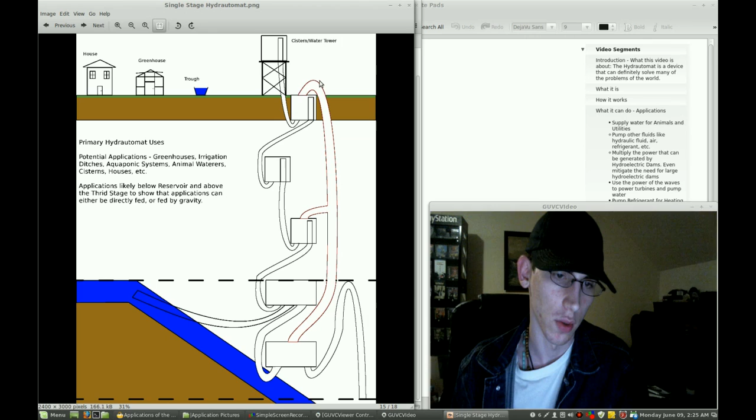So what we're going to do now is go into the first application of the Hydrautomat, which is what it was originally built to do: raise water from one point to a higher point, from a high water level to a higher one. I'm not going to go into the details of how this works - you can find another video on that. I'll put up an annotation or link just to save time and focus on the applications, because I don't want to be repeating everything in my videos every time I do this.

So anyway, you have the high water mark here, and the low water mark here. Just with this drop, you can multiply this up two or three different times, just with the original arrangement like you see in the patent. Just with this arrangement, you can raise the water from this point - just by having some of it drop down to here, you raise some of the water up into here.

The main uses of this thing: you can use it for water storage, pumping water up into a water storage tank. You can use it for agricultural and industrial uses as well. You can also use it for residential and municipal reasons.

So I'm going to give you a list of some of the things. For agriculture, you could supply water for irrigation ditches and any kind of drip tape, any kind of irrigation out there - there's many different forms, and a lot of new stuff coming about in the past few years especially. You can basically water plants with it, and supply water for animals - here's a little trough, and you also have automatic water feeders and stuff like that for animals.

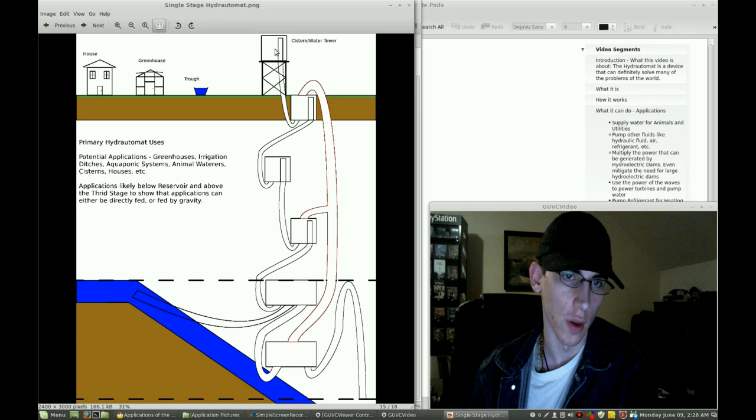For houses, if you have a cistern or water tower that's high enough, you can just gravity feed the water into a house, because the water pressure falling from up there creates equilibrium at about this level. So a house below has water that's always pressurized to some degree. This means you can provide pressurized water for houses, so when you open the faucet on the sink, it actually flows out - that's another thing you can do with this, have a gravity-fed water supply.

You can also use it for aquaponics systems, which is basically the same thing as irrigation - or, every time I say aquaponics I forget about hydroponics. Yeah, you can use it for hydroponics, you can use it for aquaponics. You can use the Hydrautomat for all kinds of different things like that. Aquaponics is pretty interesting - I won't even get into that, but you can also do cisterns and things of that nature.

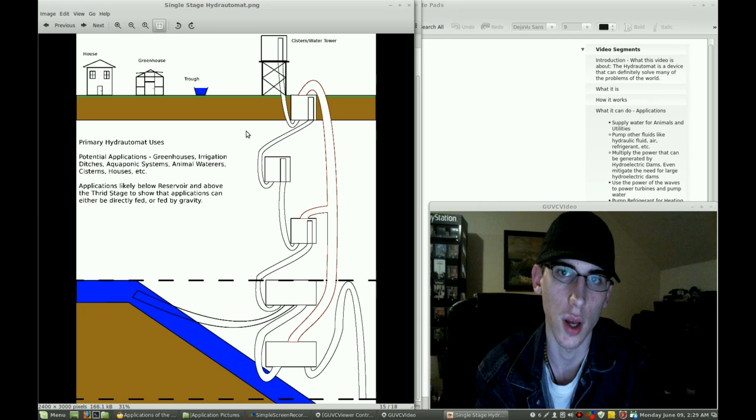So basically, it's mainly domestic, maybe not so much industrial. You can use it for cooling and stuff like that, supplying water for cooling. It's primarily agricultural and kind of small scale stuff you can do with the Hydrautomat as it is.

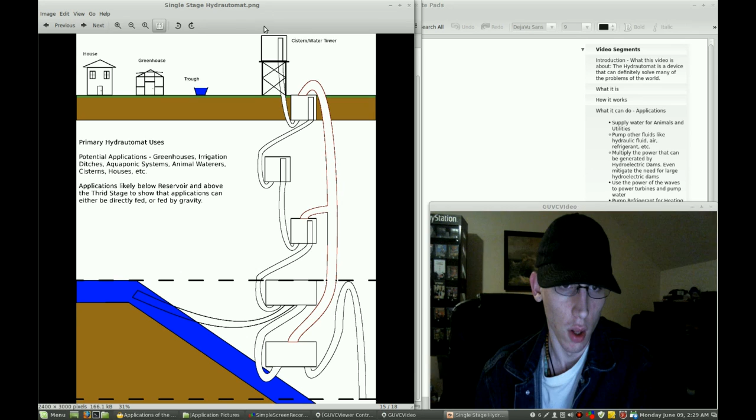You can also stage this thing. You can have more than one Hydrautomat connected to another in order to get even greater heights out of this thing. So that's another thing you can do with this device.

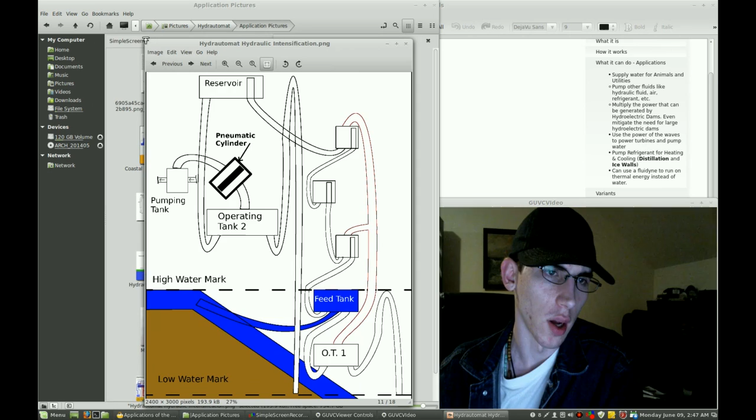Now another application for the Hydrautomat is actually the ability to pump different fluids with it. Even though it's originally designed to just pump water for irrigation, you can actually use it to pump things like hydraulic fluid and even gases, if you get a hydraulic cylinder or something like that to separate out the two different fluids. If you keep the air in the operating tank separate from whatever fluid you're pumping, you can use the action of the Hydrautomat to pump whatever fluid you want - it could be a gas, a vapor, a liquid, even a thicker liquid like oil. You can actually pump with this device.

Very interesting. So I'm going to show right here on the screencast. You can see here it says pneumatic cylinder or whatever, that's what I'm talking about. Basically this is a piston or something like that, and what this acts to do is help separate the fluid in the pumping tank and the communicating hose right here. By the way, this right here isn't directly connected to this at all - they're just intersecting, but the air in here is not touching the air in here. This is separate from here, just to let you know.

Anyway, as long as the gas or whatever you're dealing with right here is separate from what's in here, you won't have to worry about something like ammonia or refrigerant seeping down into this hose and interacting with the water, because it can contaminate the water when it goes back out into the river, and you'll lose whatever you're trying to pump, provided it's not like air or something. If you're pumping alcohol, ammonia, freon, or other fluids, knock on wood they don't come through this thing, but if you get the proportions right, there's no way this thing's going to be coming up through here unless something really disrupts the architecture of this thing.

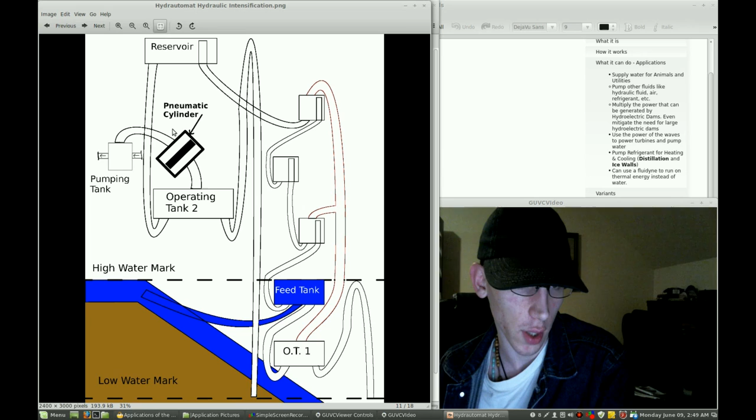But as long as this is calculated out, you're not going to have a fluid come up through here. But as for a gas, yeah, you can have a potential mixing - like ammonia could come up through here. If this hydraulic cylinder wasn't here, ammonia could seep up into here, mix in with the water, and create ammonium hydroxide, or household ammonia as it's also called, and that would get out into the groundwater and wouldn't be good for the earth either. So that's why this right here would be very useful to have.

So if you're dealing with air or something you want to pump, you get a cylinder, and when this thing pressurizes, it pushes the cylinder here, the cylinder pushes the air in here, and that pushes whatever's in here out. Then when this drains out through the siphon, the air sucks on here and pulls the cylinder from here to here, and then it pulls the air subsequently up into here. And when you have that vacuum, this check valve closes, and then the only place it has to pull from, aside from inside the tank, is the inlet.

So then it'll just pump the stuff in here, and on the pressure phase it pushes out through here. Pretty interesting. You could pump all kinds of stuff with it. You might even be able to pump hazardous materials with it, as long as you have something to separate it so you don't have to worry about it getting in, and as long as everything is made to spec to handle whatever it is you're handling.

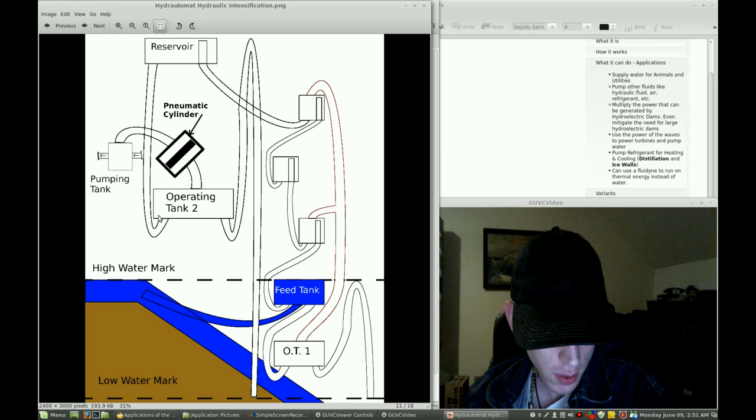Oh yeah, the intensification - I don't think I wrote this down. But with this device you can take advantage of the hydraulic multiplication of force. As you can see, this pumping tank is probably a third to a fourth the size of this operating tank, right?

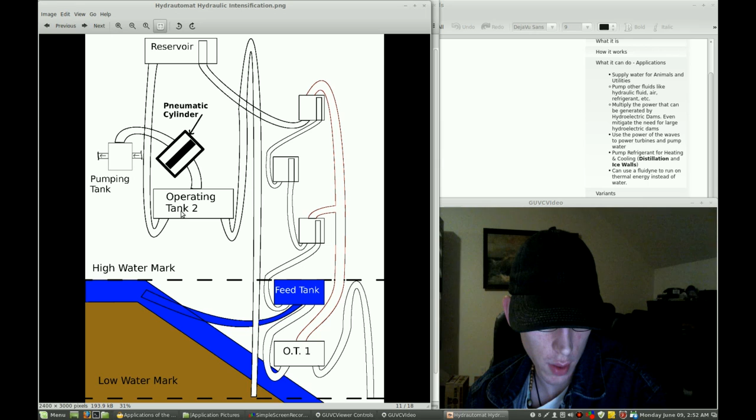When this operating tank fills up, say the pressure of the water falling into it generates pressure like, I don't know, 5 psi. This is incremental and eventually stabilizes, so it's actually very dynamic, along with the fact it's an open tube. But just say, for example, we got 10 psi - an easier number to work with. So there's 10 psi in this operating tank, and say this thing is 1/10 the size of that, even though it's really more like a third or a fourth.

Provided the hydraulic and pneumatic cylinder dimensions are correct and calculated out - or let's forget that for a moment and just say there's directly a hose connecting to this tank. If you have 10 psi going in through here, and this tank is 10 times bigger than this one, what will happen is the pressure exacted upon this tank here will actually be 10 times the amount, because it's 10 times as big. So it'll be 100 psi in this tank right here, while here it'll only be about 10.

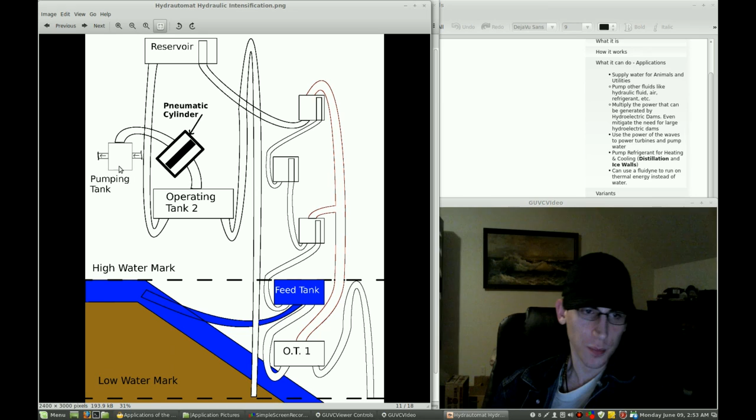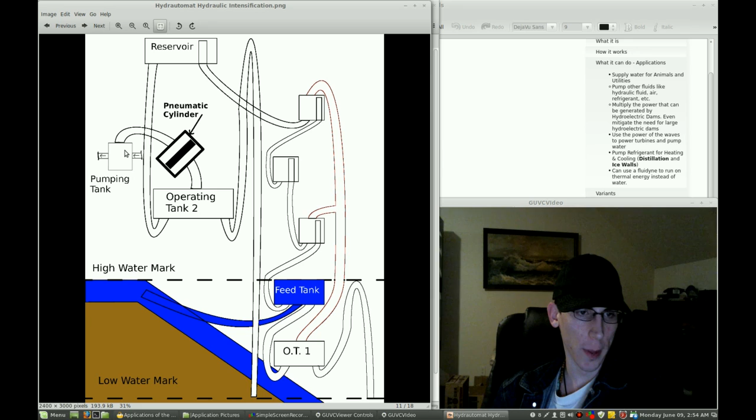That's called hydraulic intensification. So if you need high pressure for whatever reason, you can just have a gravity-fed system generating a relatively lower pressure. But since there's such a high volume, when that pushes on a smaller tank, you actually have a ratio there that intensifies the pressure. So you can create much higher pressures with just the same amount of starting pressure through basic hydraulics.

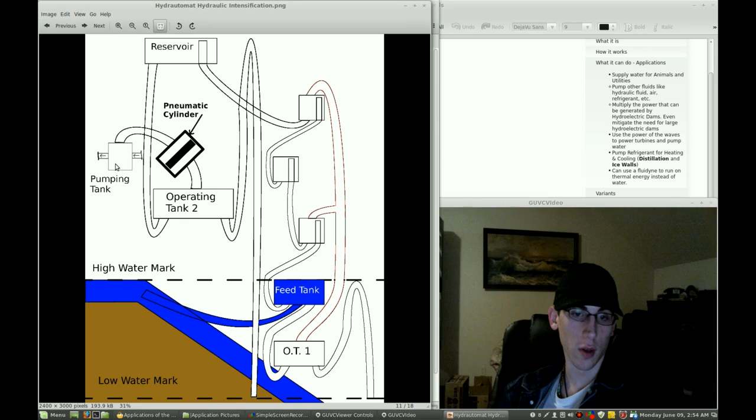Basic pneumatics is another thing you can do with a Hydrautomat to help pump things even higher, or do whatever it is you want to do with it - run a pump station or whatever. So that's another interesting application for it.

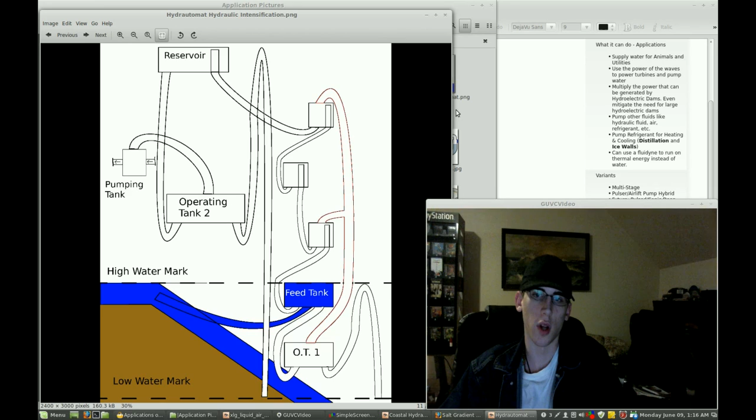Third really interesting part is that if you pumped something like Freon or some kind of refrigerant through here, and had a compression fitting and a compression valve or an expansion valve - basic refrigeration stuff - you can create heat and cold through vapor compression refrigeration and vapor compression heating. What you can do with that is create two things.

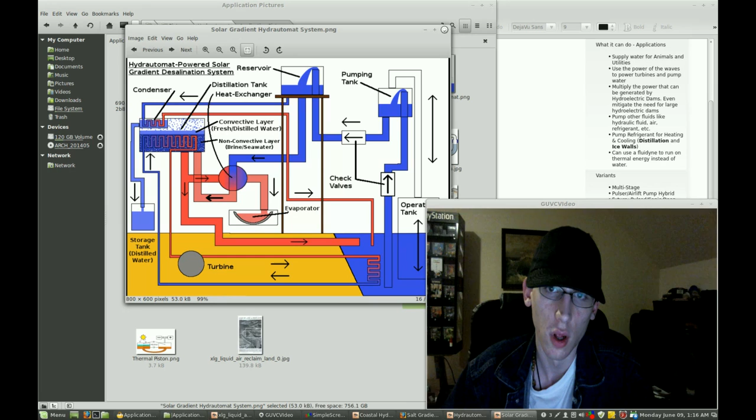You can use it to distillate water and stuff, like is seen here. But what you can also do is create - you can also freeze things with it too. So you can use it for refrigeration inland, for domestic, industrial and commercial uses as well.

And basically what you do is you just run the refrigeration coils into the water, in like an ocean or something, and you can create a temporary dam made out of ice with this thing.

In 1932, I think they were planning on doing this, but as most of us know, World War II was coming up, and I'm pretty sure the Germans didn't want to go through with this project because this was supposed to be in Germany, right on the border of Denmark, near the North Sea. That didn't go through because of World War II and the invasion of Poland. They didn't want this thing to get sabotaged, and a little bit of land would have detracted from the war effort, I'm sure.

But anyway, this device can create temporary ice dams, which can be used in civil engineering for building temporary structures for all kinds of things. In this case, it was to reclaim previously submerged land. They also wanted to use a dredge to pump the seafloor into the other side of the dam, so you could fill it up with new land and use it for agriculture or whatever they wanted.

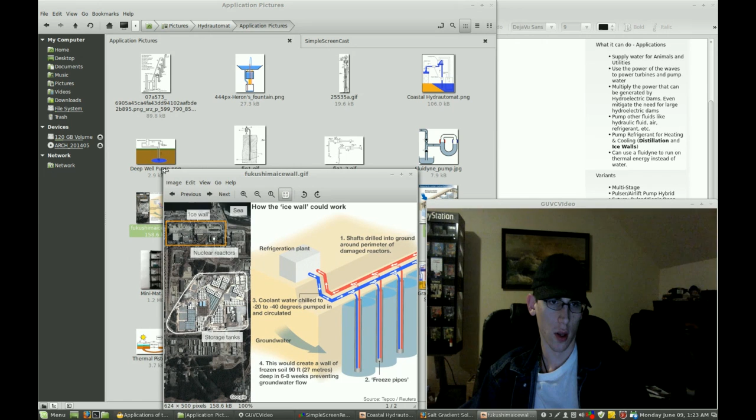Following up on the ice wall, another thing that's doable with it, which is actually being proposed right now, is over at the Fukushima Daiichi nuclear power plant in Japan. They're proposing to put up one of these ice walls there, probably powering it off the grid or something like that. This thing would be used as a kind of sarcophagus to encase this ring of nuclear reactors at the plant.

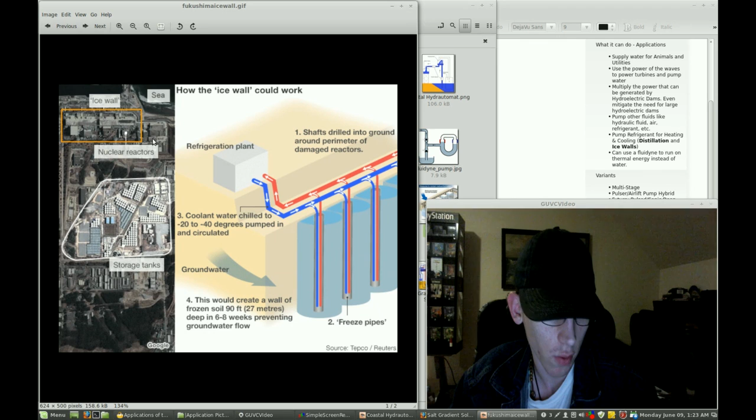So all the reactors that are leaking right now, what they want to do is surround it with a perimeter of refrigeration coils that go down into the ground, entombing it with ice. This would prevent groundwater from washing down into the aquifer and carrying contaminated ground out into the ocean. I hope they get this done quickly, because it just keeps leaking all the time.

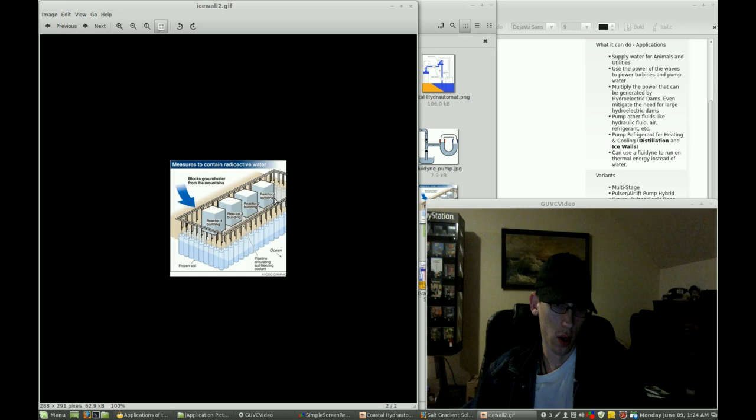Anyway, this is one thing that's been proposed, and it's a pretty good idea. That's another thing you can do with an ice wall - use it as a safeguard against nuclear reactors leaking, or at least keep groundwater from carrying away contaminated soil. It's a safeguard against the more likely doomsday scenario - nuclear reactors going off instead of nuclear war. Maybe even put an ice wall around those storage tanks.

Aside from the nuclear thing, you could also deploy an ice wall for dams and waterways. So whatever the reason, if you wanted to dam something up temporarily with ice instead of building a giant wall, you could just run some refrigeration coils and do that. If you want to make a new hydroelectric dam, you can do that too.

So one of the larger scale things that can be done with the Hydrautomat, namely with structures that already exist like hydroelectric dams, or maybe even a waterfall - this is mainly for hydroelectric dams already in existence, not so much a waterfall, but any kind of drop or decent sized slope.

You can actually use this to assist the dam - it's kind of like an auxiliary power unit. You can use the Hydrautomat as an auxiliary power device, one that helps bring a secondary source of power to an already existing hydroelectric dam. As you can see here, this yellow bar would be the dam itself.

This structure here would be the turbine, this would be the low water mark, and this would be the high water mark. This right here is where everything would be dammed up, and this would be the other end of the dam where there's not much water. This would be the inlet, this would be the outlet, and this is kind of like an entrance to that.

So I kind of oversimplified the Hydrautomat - I just put a gray bar instead of drawing all the tanks. You can see the one tank here at the top of the reservoir, so it looks like a water tower more than anything. It works the same way as all the other conventional Hydrautomats - this is basically a traditional Hydrautomat, but it's just really tall.

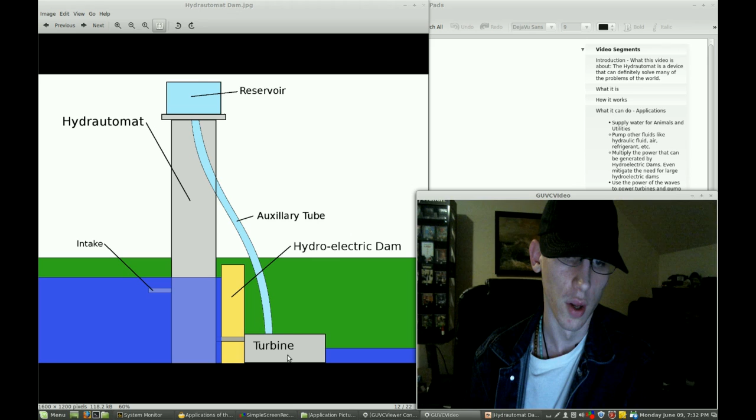150 psi limit here, another 150 psi limit here, makes 300 total, and that'd be supplied by 300 psi pressure being generated by the fall from the reservoir tower down to the turbine. So you could power twice as much if this thing was running at two-thirds capacity, or if this thing was running at full capacity right now, you could have three of these things powered, something like that.

And that's one application you could have with a Hydrautomat - you could use it as an auxiliary structure to increase the output of a power station like this, out of a hydroelectric dam. You increase the output by three times as much, just with the normal thing alone.

And if you selectively control which tanks can have pressure and suction applied to them, you could have like 10 or 12 or however many pairs of these things up in the air, just going to ever greater heights. And even though you could have a setup that would only allow you to run like say two pairs of these, only run two open tanks, only run two closed tanks.

So say this is like the default arrangement where the operating tank can only power two tanks at a time, and you have like 10 of them. Well, you can not run eight of these things and just slowly carry the water up tank by tank.

So say that these tanks are in service now, and then you want to get this up to a higher one, but say there's a second pair up here, say there's a third closed tank here, right? And you want to power that closed tank. You want to have the operating tank create a vacuum that can suck this water up into this third closed tank. But these guys already would overload this thing, so you won't get any real power out of it.

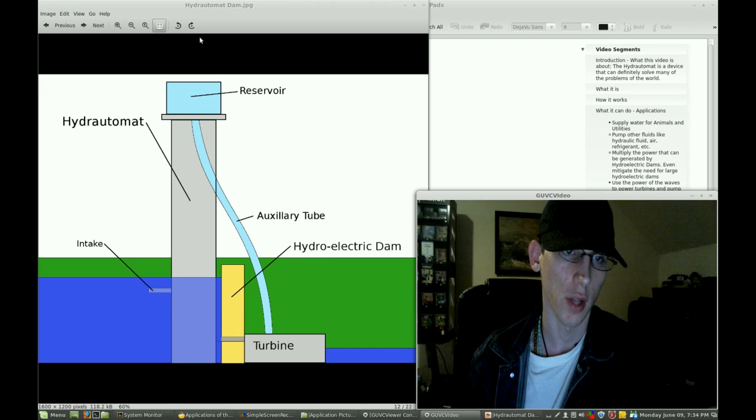But what you can do is turn off the closed tank here at the bottom, so that only this closed tank and this closed tank here - imaginary one right now - would be running. So these two would be pumping, and this one wouldn't be running, and you just shuttle it up that way. So you could turn off the ones on the bottom, and then turn on the ones at the top, and just slowly, piece by piece, step it up, just by closing off the air supply to certain tanks.

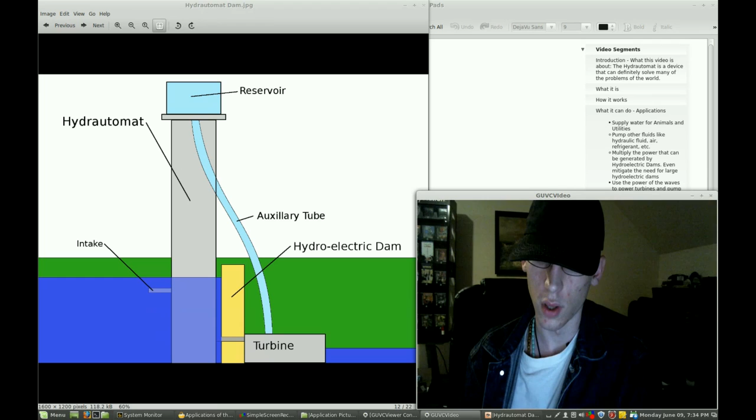So that's another thing you can do with this thing - you just take it to a really large distance just by controlling which tanks have power to them. That's another really interesting thing you can do with the Hydrautomat.

All right, now we're going to move on to some more varied versions of the Hydrautomat - things that are quite a bit more out of context with the original patent. And this one right here is a coastal, or more maritime, version of the Hydrautomat, which means that it's meant to operate around the coast and wherever there's waves.

You can do it in the Great Lakes or anywhere you have a large enough body of water that you usually get some decent sized waves out of, enough to power the Hydrautomat.

So basically this thing is a wave powered Hydrautomat. The way this works is, as you can see right here, we have the operating tank. And in the operating tank, you can tell there's no feed tank on top.

There's no siphon coming out of it or anything like that, and that's because it doesn't actually need one at all. Instead, what it uses is just the power of the waves to push it up and down, because the operating tank is actually modified.

Instead of having a closed container where you have a few openings in it, you have like one bulkhead at the top and two at the bottom.

Instead, what you have is just an open bottom container, so that this right here is just open to the ocean or whatever, and the water can penetrate through without any problem.

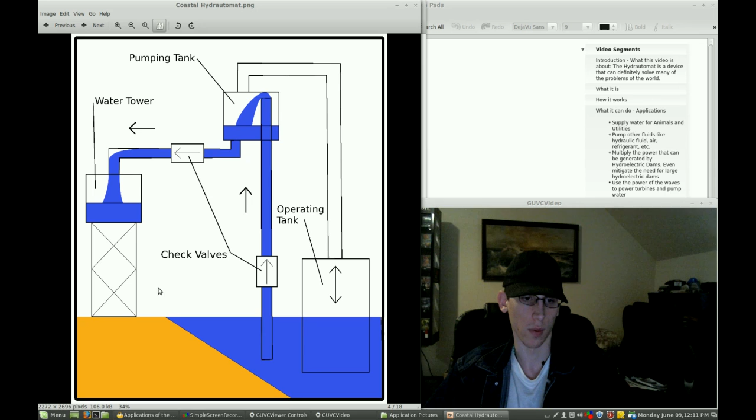And yeah, so you can power something with that right there, just by force of gravity. This much of head here. And yeah, so that's for this part here.

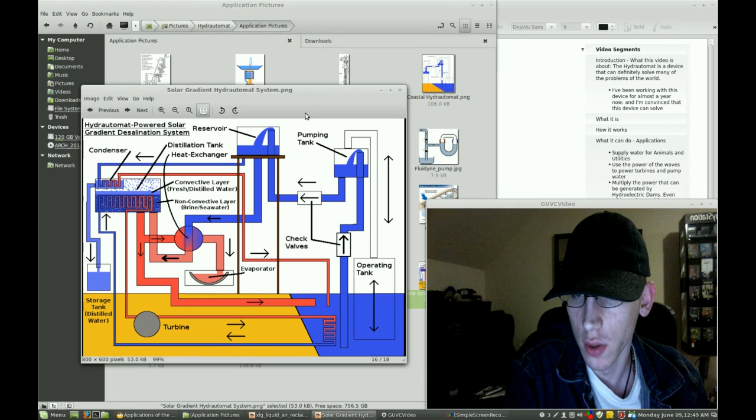Okay, now we're going to go on to the solar gradient pond, and thankfully a whole bunch of software issues have been worked out. So anyway, we're going to go on now to the other application of this.

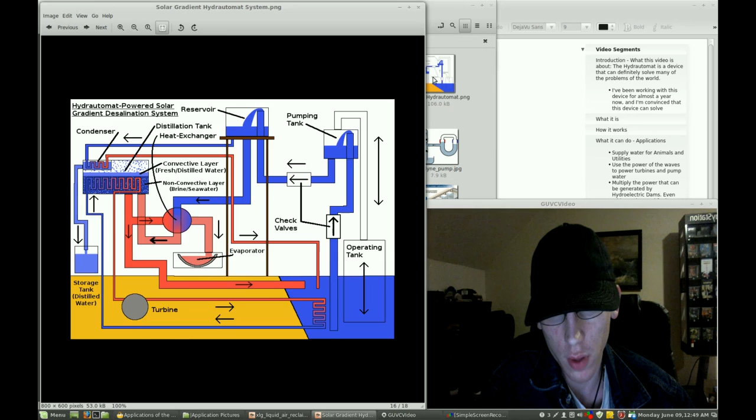Hydrautomat, and as you can see here, I have a full-blown illustration of it with all the colors and nice things to it. Basically, what you can do with the Hydrautomat is you can use that coastal configuration you can see right here, which I think I explained in a previous clip.

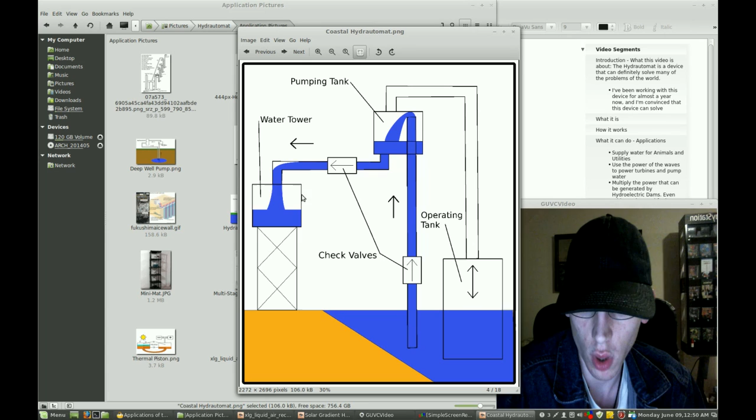I'll have to go back just in case things get all messed up. I've had issues with these screen recorders and webcam things. But anyway, this operating tank here has this coastal thing where it's powered by the waves, pumps water upward, and instead of just simply putting it into a water tank right here.

So instead of just pumping the water up into here like this Hydrautomat is doing, you can have this awesome looking thing right here, and you can pump that into the water tower. But the water tower, instead of just sitting there for whatever reason, can actually fuel what's called a solar gradient pond. I'm gonna have to explain this all over again because my last video got annihilated.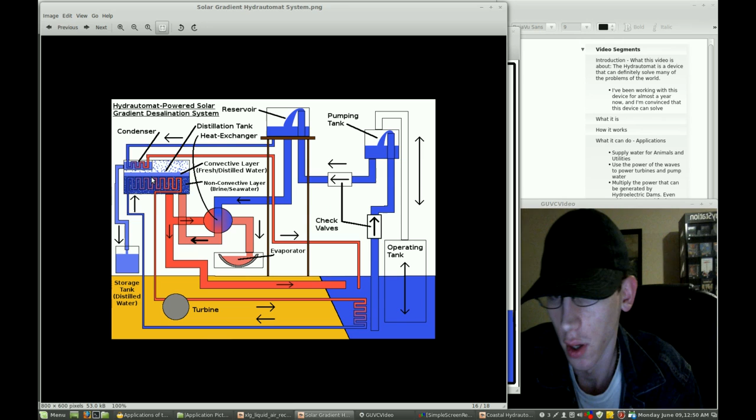What will happen is that the solar gradient pond works like this: you have a container, or usually they just dig a giant pit, line the thing with polyurethane or whatever, fill it up with salt water, and then let it bake there in the sun.

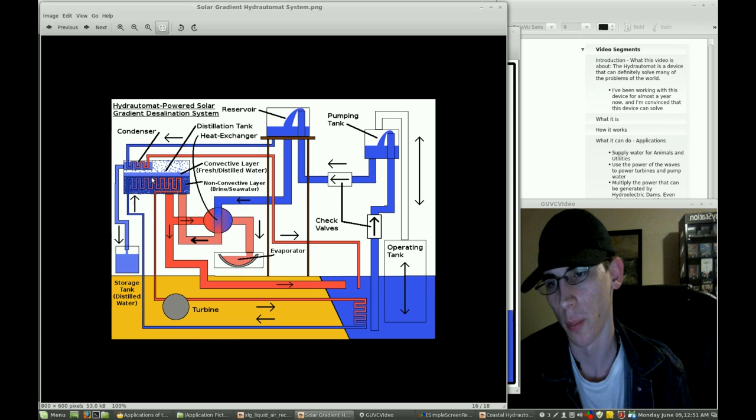And what will happen is we'll have two layers of stuff. They'll fill it with salt water on the bottom, like you can see right here. You see my cursor? This would be the salt water and the brine, this dark blue here with the white speckles. I'm going to zoom in.

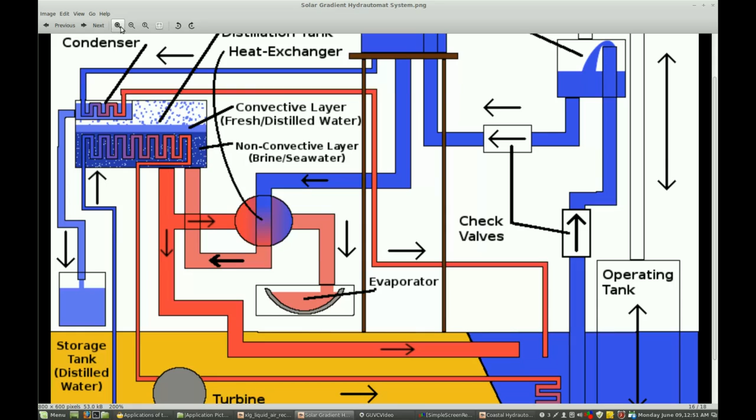Can't believe control zoom in doesn't work. This right here would be the brine or salt water, as you can see. And it's called the non-convective layer. I'll get to that in a second.

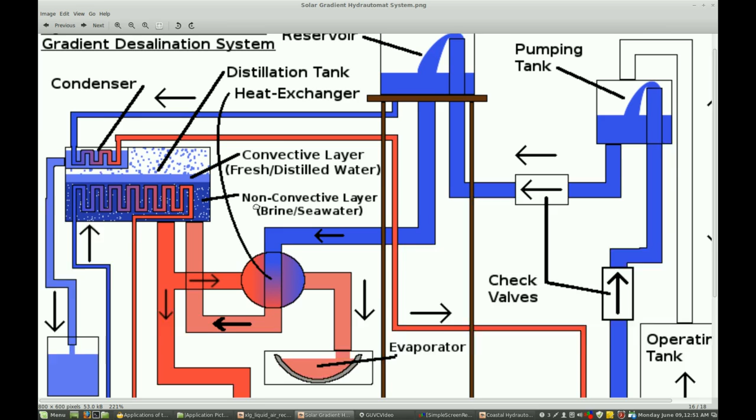But the second layer here is a layer of fresh water or distilled water, and that's called the convective layer. Now what happens is—gotta learn how to work this program—anyway, what'll happen is, say there's a sun or something here, right, and the sun's beating down on this.

What'll happen is that the sunlight will penetrate through this layer of fresh water here because it's transparent. And what it'll do is it'll hit this salt-saturated brine or seawater here, and it'll start to cause it to take on heat.

Now the brine seawater is more dense and stuff. It's got a lot of salt content, so it stores the heat more than fresh water would, because fresh water is very transparent, so it'll just let it pass through a lot of the time. But the salt water will actually store the heat a lot more. It's kind of like heating oil or something—it just keeps the heat in more. And that's one thing that this will do.

Also, it says non-convective here. What happens is that since there's so much salt in the brine or seawater here, if nobody knows what brine is, it's basically salt water, but it has a lot more salt in it than normal salt water like you find in the ocean. So it's called brine. That's what brine is.

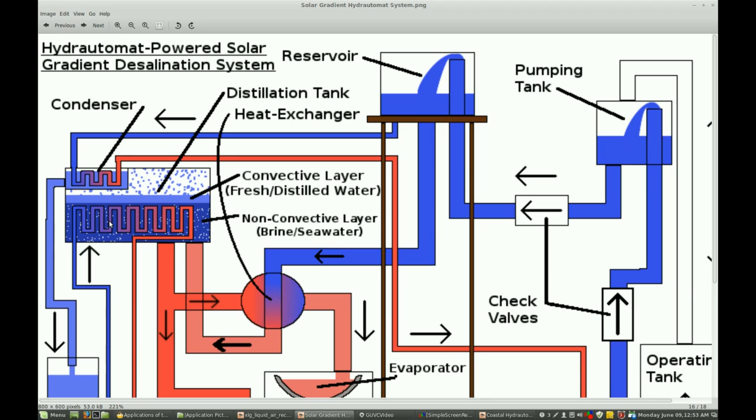So anyway, there's so much salt content in this water that convection can't really take place. Convection is basically where the hot part of the fluid will rise and the cold part will sink, so you'll have a cyclic action. But with brine, it's so heavy that convection doesn't really take place at all. It just sits there and it'll bake. So there's not going to be much movement or heat being exchanged—it's just going to sit there and get baked by the sun.

So this non-convective layer will just sit there and bake. I won't bother to pull up the article, but I think there was a report of the temperature being like 92 degrees Fahrenheit at some test site in Israel where they're testing this stuff. On a 92 degree day, they had like 180 or 190 something degrees Fahrenheit inside the pond. So say the air temperature is 92 or 82 degrees, this thing was actually running at like 192 at the highest. That's how much this thing can heat up, and that's quite a decent amount of heat.

And this was just with a gradient pond. When I say gradient pond, I mean the traditional version where it's just a pit open to the air. But with this device here, I think it's a bit different. First, though, I want to go over everything. Okay, I've pretty much covered that part.

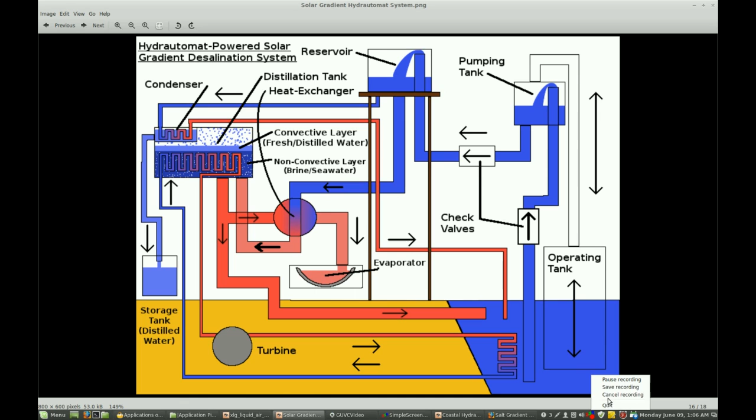So I'm going to pause this now, and I'm going to go on to the next thing.

All right, now I'm going to go to some more, I wouldn't say advanced parts of the Hydrautomat, but some things that are a bit more sophisticated, at least haven't been discussed very much, or maybe they just weren't illustrated in some of the original news articles and stuff that I can find about the Hydrautomat.

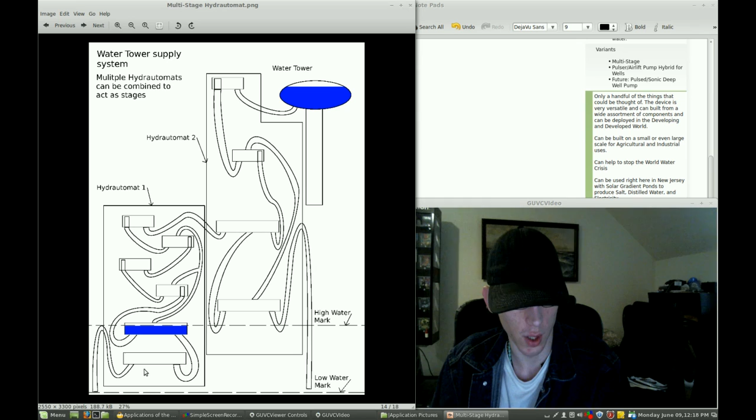So to extend it, you could take this tank and use it as another feed tank, or run it to another dedicated feed tank. That feed tank can feed into a second operating tank, which is above the high water mark, so this becomes the new high water mark instead of this dotted line. The low water mark stays the low water mark. So instead of just this distance determining the pressure and this distance determining the suction, now this distance determines the suction and this distance determines the pressure.

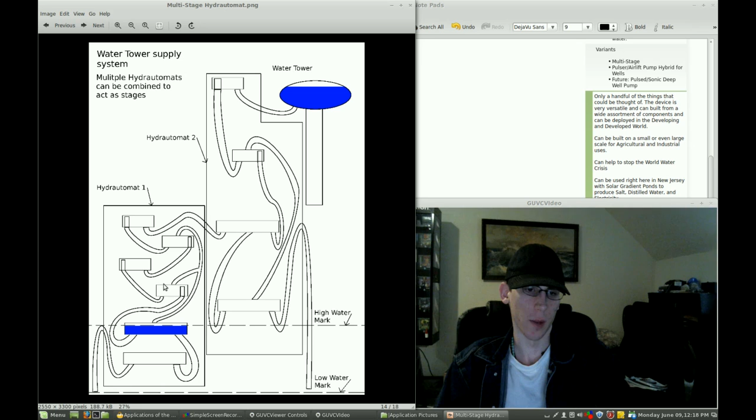That's basically what gives you a lot more push and pull, and allows you to lift the water to greater heights than with a smaller arrangement. Of course it will take a bit more time to pump up and replenish, but now instead of pumping it to here, you can pump it to here. This arrangement has two pairs of open and closed tanks, one pair here and one pair here, compared to only one pair in the smaller version.

You can actually add on a second pair, and this thing is basically going to be like twice the height, or at least as shown here in the illustration. If you link two Hydrautomats together, instead of lifting it to just the normal head distance, you can lift it 2 or 3 times that, because this right here is the head, and the Hydrautomat usually lifts it to like 2 or 3 times that, or whatever. It all depends on the distance. Usually it's like 1 to 2 times or something like that. Depends on what you want to do, depends on the size.

But say you have this, for example, and that's like 2 or 3 times, and this right here can easily be twice that. So that's kind of the power of this thing. It can lift up many orders higher than what this thing could do here, just by linking one Hydrautomat to another. You can lift up to something really high, like maybe a water tower. It won't take much, just a little bit of the proper amount of head, and you can take this thing way up. It all depends on what the settings are.

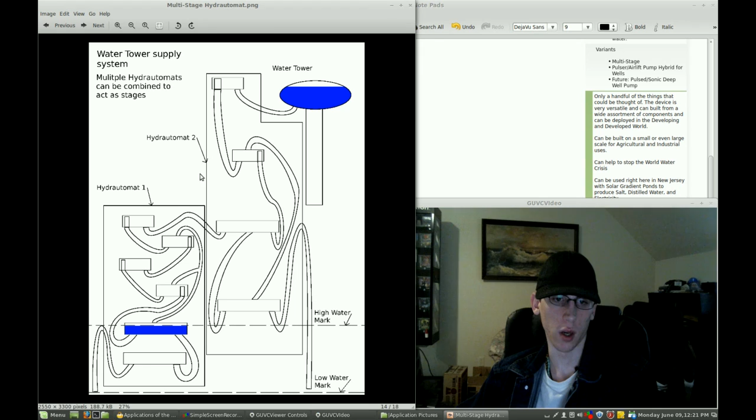Then when it gets to the greatest height, you can take this right here and run it to either a conventional operating tank like this, or you could run it to a hybrid or just another operating tank dedicated to that. You could have a different operating tank powering a tank here, powering this right here, and this would suck up the water collected from here and pull it up, whatever you want to do. There are many different ways you can tweak this thing, and I'd definitely recommend experimenting to find the most optimal arrangement.

So that's for the multiple Hydrautomat. Okay, so a lot of you at this point might be thinking, okay, this thing only runs on water, right? And it's only applicable in places where you have water on a slope, a hill, a dam, or you could use this thing over by the ocean. But unless you have a difference in elevation, this Hydrautomat can't be there, right? It can't exist. Well, it can exist, but it can't work.

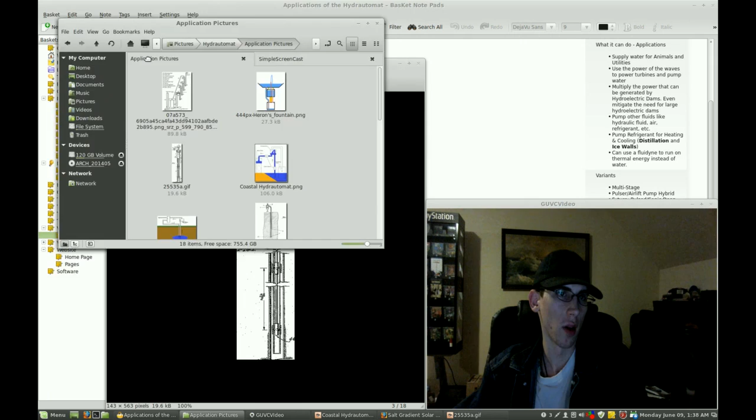Well, actually, there's a few interesting things I came across. One thing I was trying to create after it got really cold and I was getting frostbite working on this thing, working on the Hydrautomat back in November, I decided to try and create a Hydrautomat that ran on heat or cold, something like a thermal Hydrautomat out in the middle of the desert that runs in a closed loop. It just heats up and cools down to create that pressure lift, which you can easily do by filling up.

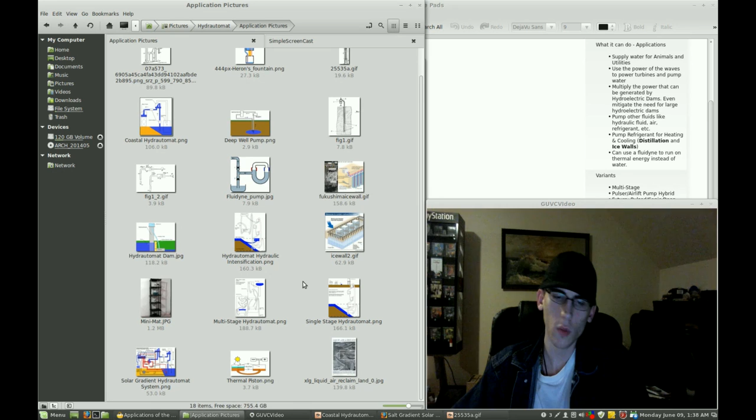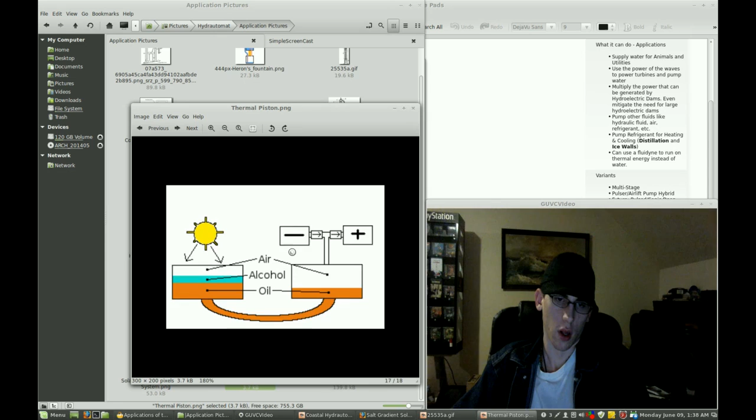You could take the operating tank, for example. Well, I really didn't zoom in, did it? Hold on a second. There we go. With Linux, for some reason, it's very hard to try and get this thing just right.

Anyway, what you can do with the Hydrautomat for a thermal version is that you can have this here as the operating tank. So instead of having water go up into this thing with the air tube and a siphon coming out through here, you could have just this as the operating tank and have a blocking fluid like oil, and have something like alcohol, some kind of refrigerant or expansive liquid, or even water right here, and then let that heat up and cool down by the sun, or when it gets cold, it contracts and stuff like that.

You just let this thing sit out in the sun, during the day and night, so that as the day progresses, it becomes hot, expands, and pushes out. Once the thing pushes out, it pushes the oil up through here, compresses the air, and then pushes the air up through here into this positive accumulator, or wherever you want to run it.

Then when it gets cold, at nighttime or whatever, the refrigerant will compress and it'll pull the oil up into itself, kind of like it is right here. And what happens is that'll compress and it'll suck the air from this negative tank here, or wherever, in through here into itself.

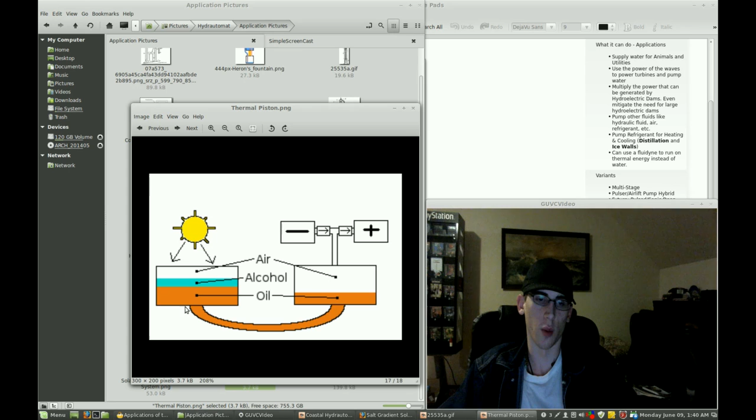You can pump air or whatever you want with this arrangement here. So you can use this as the operating tank to pump water or whatever through a more thermal arrangement right here. So that's one thing you can do.

Another thing you can do is just have a plain tank without the oil or whatever. Just have a closed tank like this, filled with alcohol, ammonia, freon, any kind of refrigerant, something that expands. Inside of here, you can even use air or water, but it doesn't expand as much.

Then what you can do is you run an air tube to like a cylinder or something like that, mechanically. When I say cylinder I mean like a piston. So what happens, it pushes on the piston, and on another side of this thing it can compress and expand as well. So this thing will compress and expand the cylinder without the refrigerant escaping.

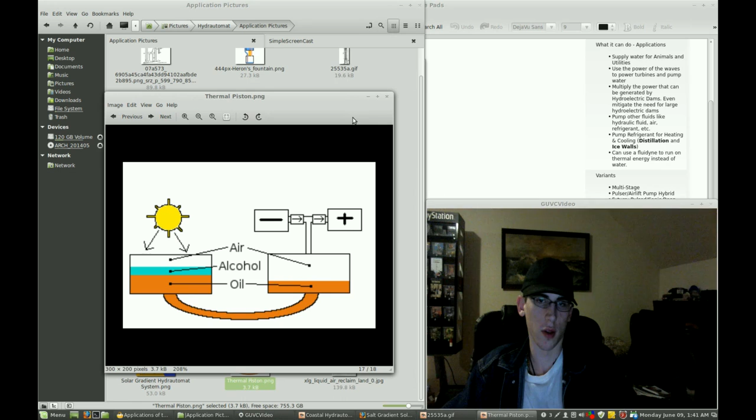And you can power something like this, or you could power a basic Hydrautomat setup or whatever you want with this thermal arrangement here. Or another thing that I found out just recently, which was kind of neat.

This was actually my own little invention here after I was playing with some other stuff. Another thing I found out is you use what's called a Fluidyne, which is really neat. A Fluidyne is basically like a liquid Stirling engine. If you haven't seen a Stirling engine before, I suggest you go look it up.

It's basically a thermal powered engine, just a little piston driven, heat driven piston engine or whatever. You could run the thing on top of stoves and stuff like that. It doesn't give out much power, but it's kind of interesting.

But the Fluidyne is just a pure water version of that. So instead of having wheels and pistons and stuff like a normal Stirling engine, you just have air and water, or whatever you want to use. So basically, the way a Fluidyne works is you have this whole arrangement here.

What you do is, right about where the water meets the air, this right here is a more heated up version, but around the water mark you would heat a section of it up. When you heat it up, this will start to evaporate, pressurize this whole area here, and it'll force the water down, both here and here, and force it out through here.

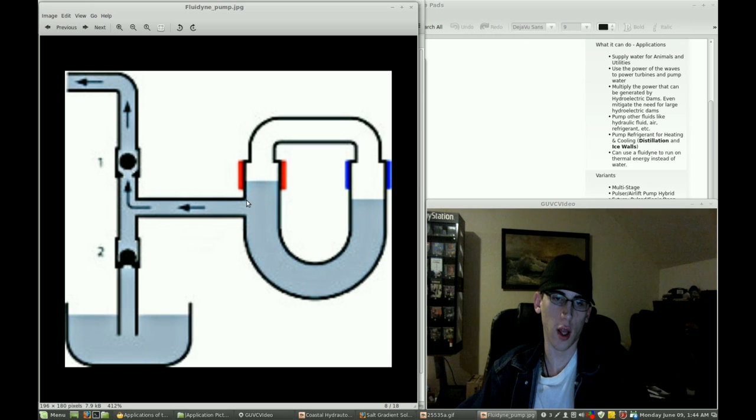And the whole rest of this structure here will start to be cooled by the air, because the air is continuously exposed to here, and it's continuously cooling this heated area. And when it continues to cool it, it'll cause it to not expand, but it'll cause it to condense.

And when it condenses, what will happen is all this gas here will start to turn back into liquid, and when it condenses, it also contracts. So what will happen is that this fluid here will start to rise again, and what previously would be dropping is now going to start to rise again.

And when it rises, well, it's really pouring down outside. What will happen is it'll start to condense, and it'll pull the fluid inward.

So what happens is this vacuum here is pulling this water up, and what it'll do is it'll actually be able to pull water, you know, from a basin or something like that, up into the tube into itself as well, right here.

And when this thing starts to cool down to a point that the water starts to fill up this heated area again, what will happen is the heated area will start to boil off the water all over again, or boil off whatever fluid all over again, and the cycle starts over.

So what you have is an oscillation of this thing going down and going up, so it pressurizes and depressurizes, creates a vacuum or whatever. In the process, you have water being pushed out and also being replenished, so it sucks water in and pushes it back out, and you basically have an oscillating pump.